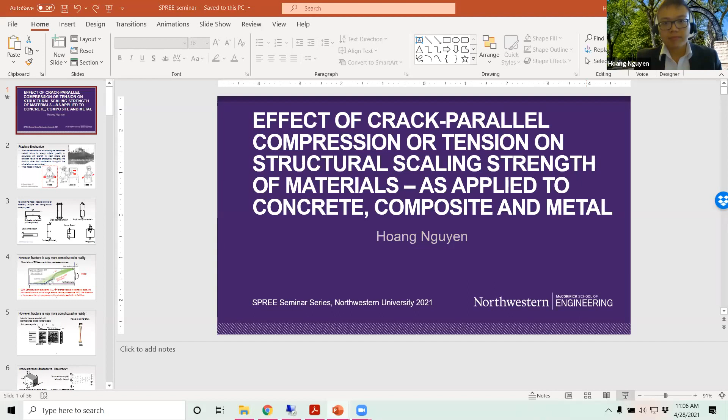As Professor Akono mentioned, I worked for a while on finding out how crack parallel compression or tension affects the structural scaling strength of materials. Today I will introduce the effect of crack parallel stress on several materials, mostly categorized as quasibrittle material and ductile material, including concrete, composite, and aluminum alloy.

Hopefully at the end of the talk, I will get you a little bit more interested in fracture mechanics and its magical world.

To start with, fracture mechanics started to grow, or originated from, some unfortunate incidents during World War II, where some ships accidentally failed. However, the design strength still satisfied the requirement, but it still failed, and the strength level they failed at was lower than expected.

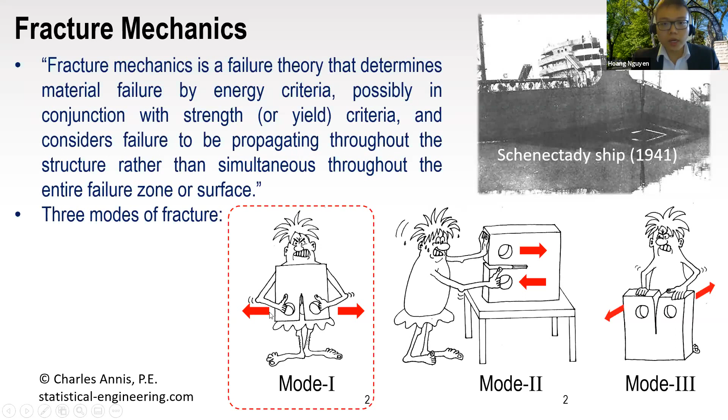For the opening mode, to extract the fracture behavior, there are multiple test configurations. You can use the single edge notch bend test, similar to a 3-point bending test, or use the same type of specimen but put it in tension. Another type is a sharply notched cylindrical tension test and the double cantilever beam.

In some extended creep experiments, people use the double edge notch, and a lot of composite testing involves the compact tension test. Tschegg, around 1985, came up with the wedge splitting test, another way to create tension ahead of the crack tip and trigger the opening mode.

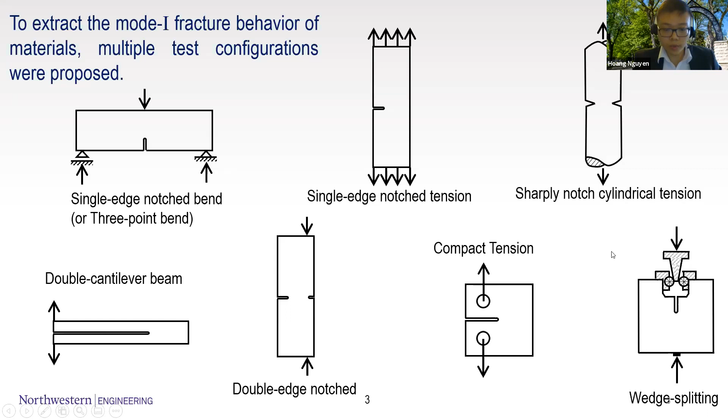However, fracture is way more complicated than that. What drew us into this direction is the shear failure of reinforced concrete beams. There were experiments done on this type of beam and loading configuration.

However, when we try to use the cohesive zone model and an LEFM-based model where the crack is aligned, we cannot capture the Vmax reflected in the measurements. When we looked into the problem more carefully, we realized that the shear fracture of beams and slabs must include a larger tensorial fracture process zone rather than a line crack.

The interactions of this zone, similar to the strut and tie model people usually use in ACI, show that when subjected to a shear crack, a compressive line forms between the support and the applied loading point. Because of that high compression, there will be interactions between the compression that's just created and the opening mode caused by the failing load.

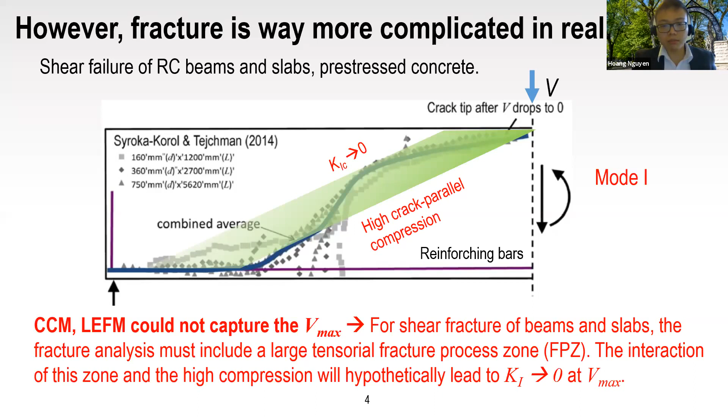From that mismatch, we think there should be some interaction there, and that explains why the LEFM and cohesive crack model could not capture the Vmax here.

Some situations are similar, for example in hydraulic fracture, especially when we couple the poromechanical stress transfer to the solid, when water comes into the crack and fractures the internal band of the crack. Under intact conditions, the rock and its surrounding environment are quite close to hydrostatic stress. However, when there's a crack, there's some release of the transversal stress, creating a deviatoric condition. Under this condition, the breakdown pressure has been observed to be either higher or lower than it should be. So that's also a scenario where crack parallel stress comes into effect.

Another scenario comes from the biomedical case, when you have the failure of a bovine femur, or the femur in general. The femur is constantly subjected to compressive load. However, when people get older, there's a change in the body condition—some osmotic effects and maybe some drying out of the bone tissue. So those gradients are changing, causing some cracks to form, and the compressive stress, which the bone is always subjected to, will cause it to fail more easily.

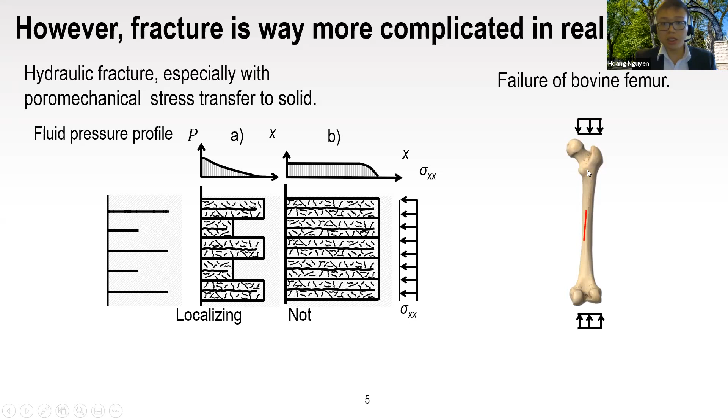So why does crack parallel stress matter? We've seen why it matters—now let's see how. Imagine a thought experiment where you have a block with a crack, subjected to several crack parallel stresses: sigma ZZ, sigma XX, and sigma XZ. In the cohesive crack model or LEFM-based model, you only have the line crack, and any existence of parallel stress will not cause any change in the stress field. This is only true when you have a very sharp cleavage that cuts through the atomic bond, and this strictly applies at the nanoscale, when two sides of the crack—or two sides of atoms—are separated.

However, in reality, damage or more mechanisms can happen. You have a damage zone, or fracture process zone—from now I'll refer to it as FPZ. Such a zone can appear at the crack, and when you have crack parallel stress, it interacts with that zone and will have a certain effect on the fracture energy. In another scenario, for example in metal, you have a polycrystal or grain boundaries forming, depending on how and at what temperature you fabricate the metal structure. This can also interact with the crack parallel stress, causing deviation from conventional theory. In this case we may see some change in GF, the fracture energy, which can cause a deviation from pure surface energy.

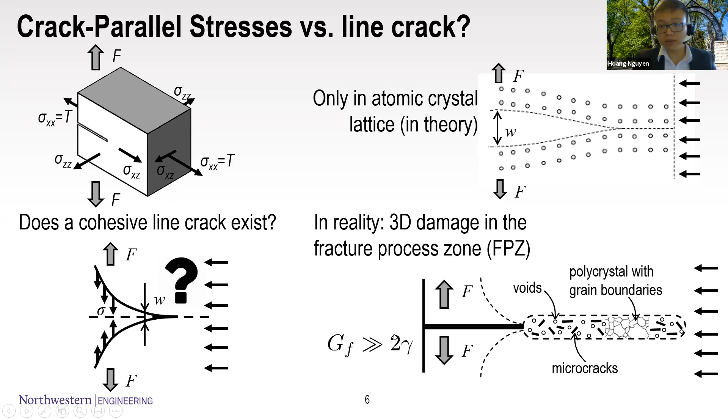However, in current experimental configurations, people don't really pay attention to crack parallel stress. That's why most proposed experimental configurations do not account for such stress. The aim of my study is to come up with a configuration where we can measure the effect of such stress, and then use a numerical model to understand what is happening within a structure that's subject to crack parallel stress.

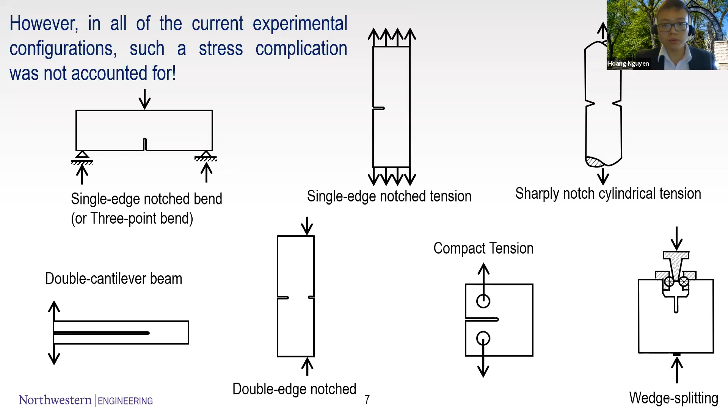Now I would mention the distinction between fracture theories. Since Griffith in 1921, fracture mechanics has evolved into several branches. The main branches can be listed as brittle, ductile or elastoplastic fracture mechanics, and quasibrittle fracture mechanics. The difference between them is that in brittle mechanics, you consider the entire domain to be linear elastic, and any nonlinearity or inelasticity is limited and can be simplified into a point.

However, in ductile material, surrounding that point and the linear elastic domain, there arises a nonlinear hardening region. This nonlinear hardening comes from the plasticity of the material, and it can also affect how it interacts with the crack parallel stress.

In quasibrittle material, that's another story. Instead of a ductile or nonlinear hardening region, you have a softening region, which is painted black here. In this case, you have a finite domain of softening, and hence it can also suggest a change in GF if you have an interaction with the crack parallel stress.

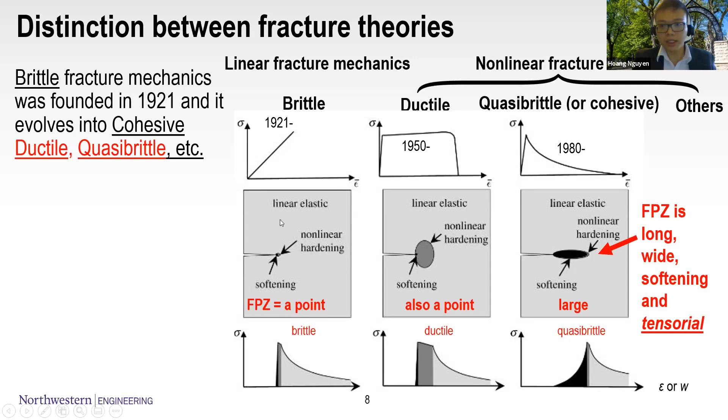So first I will talk about a quasibrittle material. What makes a material quasibrittle? It should have brittle constituents, the matrix and the inclusions, which themselves are brittle materials with no plasticity, or strictly speaking there will be some plasticity, but the effect will be negligible.

The intertwine between the materials will be created in a way that the inhomogeneity size cannot be neglected. Examples of quasi-brittle materials are concrete, tough ceramics, and some notable mentions are biological shells and gas shales, and brittle materials at the micro and nano scales, because at these scales many materials become heterogeneous.

You can see a simple illustration here showing a transition from ductile to quasi-brittle to brittle materials as the size becomes bigger.

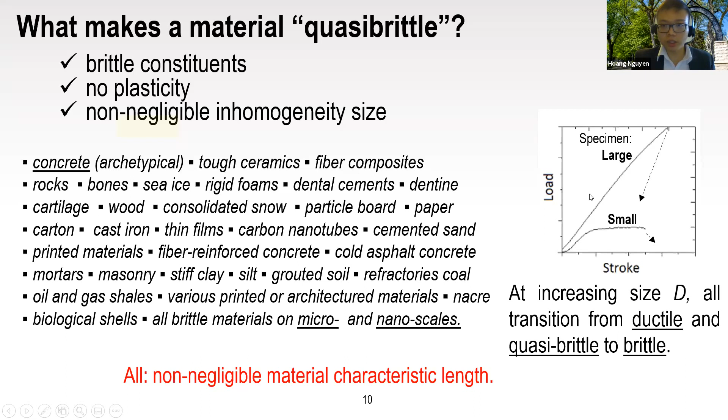For quasi-brittle materials, one notable feature is the fracture process zone. It is the area or domain where the heterogeneity takes effect. For example, for Arctic Ocean ice, it can span over 10 kilometers. For sea ice, it can be 5 meters, and for normal concrete, because of the variation in the aggregate, it can span from 5 to 50 centimeters.

For others like textile composites, the fracture process zone can be smaller and smaller when you consider materials at a smaller scale. I want to emphasize that quasi-brittleness is a relative concept, because it depends on at which scale the heterogeneity arises.

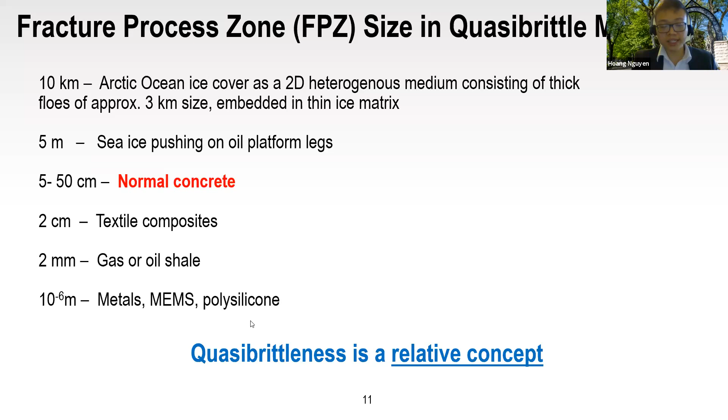So now we know something about the quasi-brittle material. How do we apply the crack-parallel stress and see its effect? We came up with a new loading configuration called the gap test. This is a simple and unambiguous way to extract the effect of the crack-parallel stress.

Several features can be listed here. You have a specimen, a single edge notch specimen, subjected to something like 4-point bending, but it's not quite right, because in a 4-point bending test you have 3 equal span lengths. In this test, the load is applied at 2 points, at a separated distance.

At the beginning, the specimen sits on a yielding pad made of a plastic material, the requirements for which I'll mention later. After the load is applied, the pad deforms elastically and then plastically at the end, but it will not be subjected to any bending moment, because there was a gap here.

However, after a while, the gap will close while the crack-parallel stress from the pad is still applied, and the bending moment that can trigger the crack starts to apply here at the support. Later, the crack tip will be subjected to both tension from the crack and compression from the crack-parallel stress.

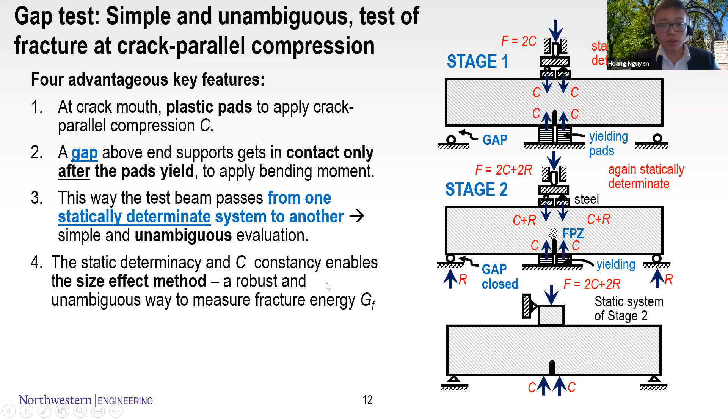A more detailed schematic setup is shown here with some steel pads, and there are technical requirements where you don't allow rotation and slip in the experimental configuration. Also for the plastic pad, because there's no rotation here, we can conserve symmetry, meaning equal deformation on the plastic pads.

As I mentioned previously, there's one requirement for the plastic pad: it is supposed to give constant pressure, or constant crack-parallel stress. So it should be made from a material that can produce such behavior.

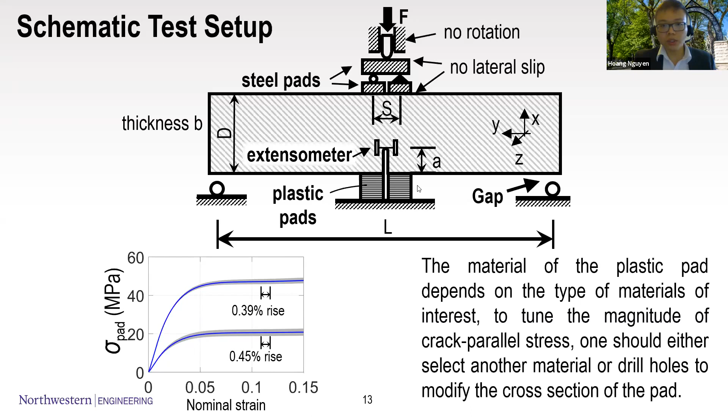For concrete, I found a material called polypropylene that has a very clean and good yield plateau, where the rise of the plateau is around 0.39% when the moment starts to apply. You can change the crack-parallel stress level by changing the material to others with similar behavior, or you can design the cross section of this material to modify the crack-parallel stress that you want.

This is a realistic test setup, and here you can see it reflects exactly what I just showed in the schematic. One loading process starts with the increase of load, from the elastic and then plastic deformation of the plastic pad.

After a while, it touched the side support, and the moment triggered the opening mode of fracture, causing another rise.

So the requirement here is that you have to leave the gap so that the fully plastic strand is developed within the pad. You can confirm that after the specimen breaks, you see the drop back to the plateau.

When I did the experiment, I put an extensometer, because this is the most exact way to measure the deformation in the experiment, rather than the machine displacement, which can cause a mismatch because the machine has some stiffness.

Extracting that information from the specimen, you can read the load and crack tip opening displacement, and gain some understanding about how the fracture developed and the fracture energy within this material.

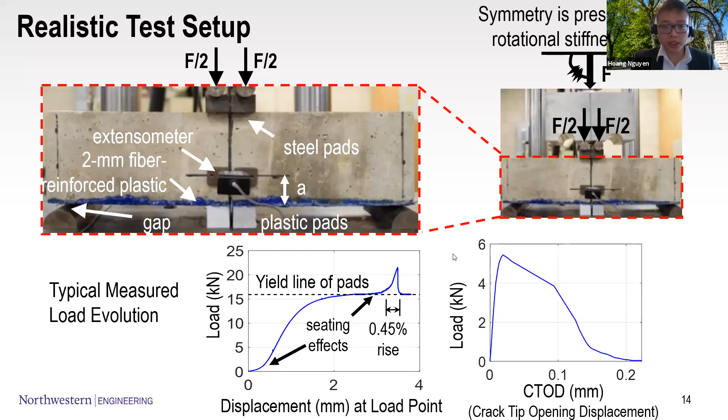So I used a numerical code to confirm the uniformity of the stress field when subjected to the crack-parallel stress here. You can see that the stress field is quite uniform, especially near the crack tip, even when you reach the maximum moment when the crack starts to grow.

This is very important, because if you use too narrow a pad, the stress field cannot be as uniform. You can see at the edge there's some bulging area of the stress, and then the stress measured at the tip will not be exactly reflected by the stress at the plastic pad.

There's also some caveat here, because you can see there's a crack, so the stress measured from the pad, which is also measured from the machine, is not exactly the stress here at the tip.

So to visualize the real sigma x at the tip, we use a numerical model. We found that the elastic model can give a quite accurate approximation of the real model with damage, so the elastic solution can also suffice.

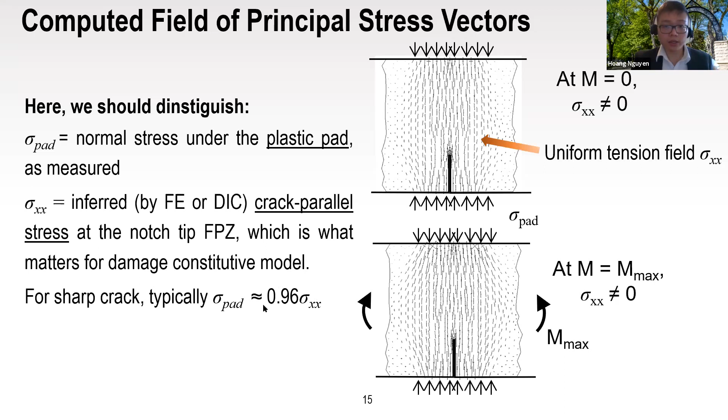It's worth mentioning there were some attempts at similar ideas. However, for Tschegg in 1995, he...

developed some of the early idea of the test in 1990, and then finalized and perfected the design using wedge splitting along with a second fixture to apply the crack-parallel stress on the wedge splitting specimen.

I will mention size effect later and how it matters. However, one big caveat of this test is that you have a non-uniform crack-parallel stress field, because when you apply the opening mode, a certain part of the applied load goes into the vertical component, which transfers into the specimen, causing non-uniformity in the stress field.

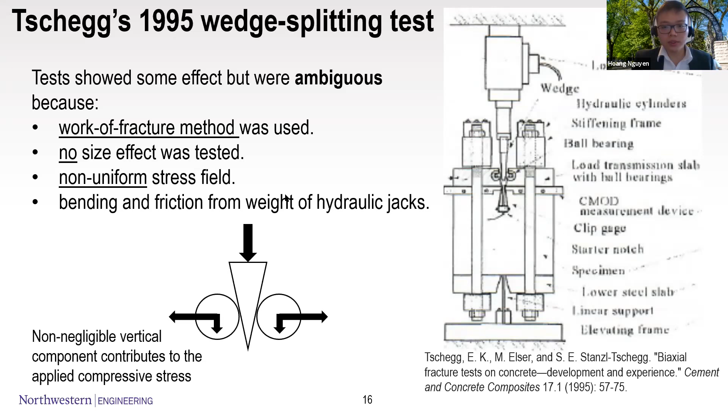So one key point of the gap test is the design and how to apply the crack parallel stress onto the specimen. Another is the size effect method.

The size effect method is a way to measure the fracture energy of the material, and this fracture energy corresponds to the initial part of the cohesive law for one material point.

For example, if you use a cohesive model and implement a bilinear curve for the cohesive law, the size effect will give you the energy of the initial part only. This is the most important part, because the later part happens only under very large separation, requiring a very big opening of the material.

At that stage, the load measured is far in the tail already.

That kind of information is important only when you consider ballistic resistance or impact resistance of the material. But in most cases of quasi-static structures, the small GF is what matters.

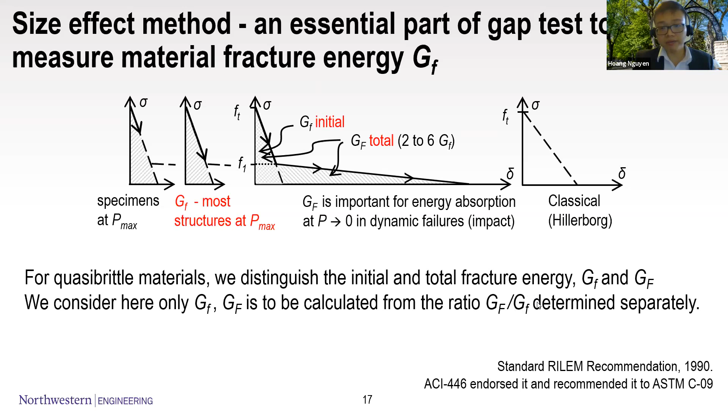However, the capital GF can be calculated from a certain ratio of capital GF over small GF, once you know the small GF.

Another caveat of the capital GF is whether or not the tail of the curve is unique. For example, in the case of a three-point bending specimen, when the FPZ starts to grow and propagate through the specimen...

at the end you have the boundary effect. So the entire FPZ changes at the end, and what you measure may not exactly be what the material properties should be.

That leads to change or variation in the J-integral with crack length, and as a result, an ambiguous reading of the fracture energy.

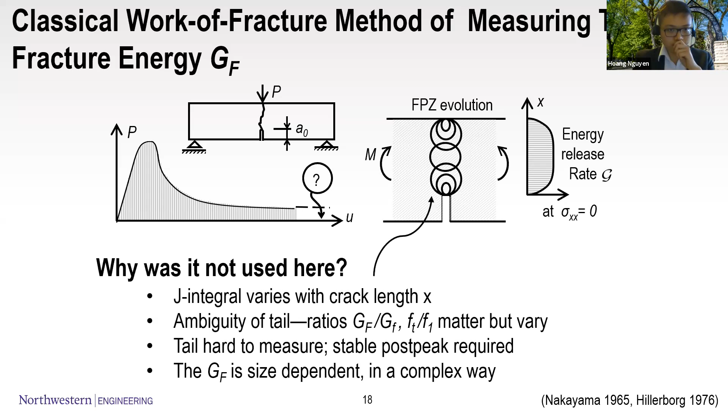So how to do the size effect method? The size effect method is based on the basic assumption that the FPZ of the material is a constant, has a constant area or constant volume. When you scale the specimen to a bigger size, that domain, that area or volume, does not change.

So you can break the energy of the materials into the part that will be released, which changes with the size—the elastic part—and then the energy dissipated within this zone, which you can see does not depend on D.

After manipulating this to get sigma n, the nominal strength—in most cases defined by the maximum load you can measure over the thickness and the characteristic length—you can obtain the relation between the nominal strength and the size of the structure you measure.

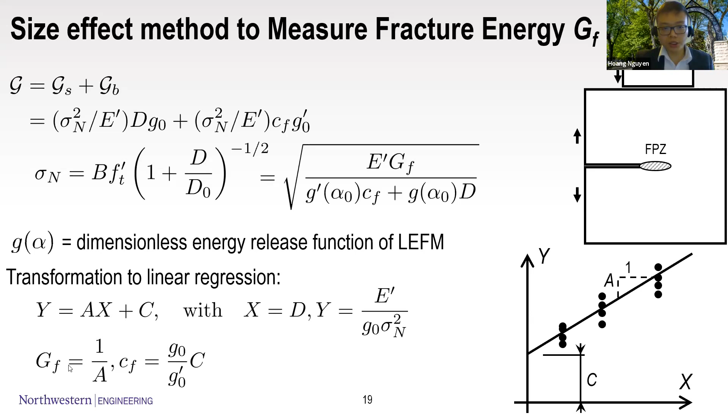This can be turned into a linear regression curve, and by fitting this, we can extract GF and CF, which is the characteristic length of the materials.

So for the size effect, if we expand the size effect curve in the regime near zero dimensions, we have some asymptotes when you have 0D. And if we expand with a big D, we have another asymptote with infinitely large specimens. This is the asymptotic matching size effect law, and it can be seen here.

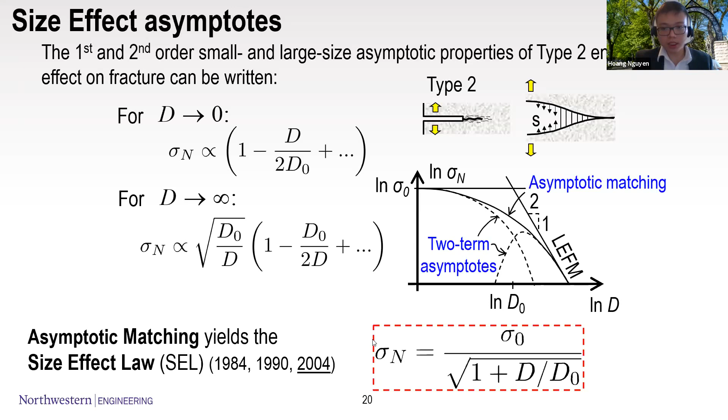I'm sorry, do you see my panel? Because I keep moving them around. I'm not sure if the audience sees the same thing as I am. You can see it, Zdeněk. Oh, okay. Let me share this slide only. Yeah, I think this one will be less disturbing.

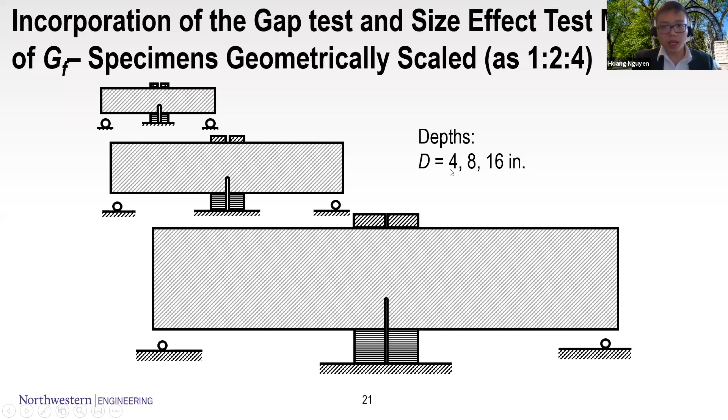All right, so now we incorporate the gap test and the size effect test method to get the fracture energy and to see how the crack parallel stress affects the fracture energy. You can see that we scale the entire setup, keeping the aspect ratio the same, and also the out-of-plane thickness the same.

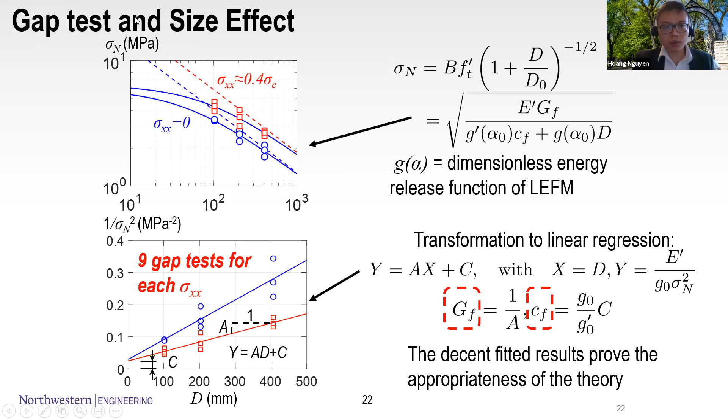The result from the gap test can be shown here, and it follows quite reasonably with the size effect method. From these, we can extract the GF and the CF, as I mentioned before.

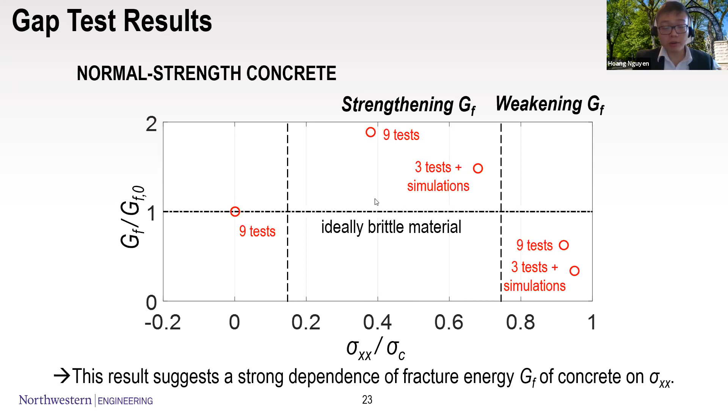So how to explain these mechanisms and the relevant behaviors? We used a model called the microplane constitutive law model, trained within our group. The model is based on breaking the stress-strain tensor into stress-strain vectors on many, or multiple, microplanes.

This reflects the fact that in quasi-brittle material, heterogeneity will also appear—the stress and strain vectors appear on the surface of the heterogeneity.

This model can capture several behaviors, especially in the triaxial stress state that appears at the crack tip: tensile cracking, splitting or spreading of microcracks, and also frictional dilatancy.

This constitutive law uses the relation between stress and strain vectors to model the behaviors, and then turns the stress vectors into the stress tensor via the variational principle.

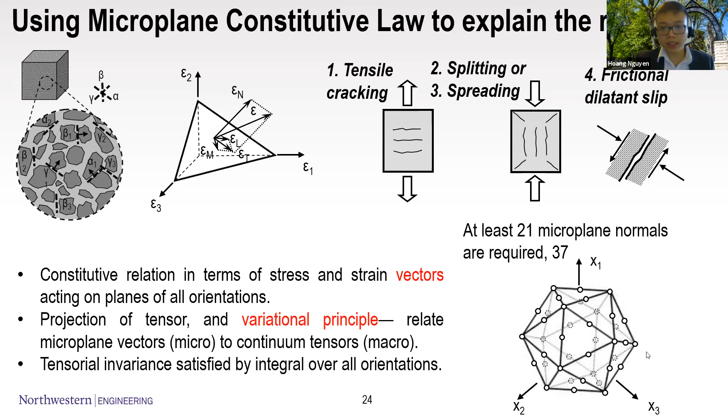Within this framework, at least 21 microplane normals are required to get a certain level of accuracy. However, in this study, we used 37.

The microplane constitutive law gives you the relation of those strains to the corresponding micro stresses. Then the principle of virtual work helps turn the micro stress vector into the macro stress tensor.

An important case that the microplane model can simulate is the vertex effect. This is a path-dependent material loading path, where you first compress the cylinder and then apply torsion to it. The plasticity-based model will predict constant stiffness for this loading scenario. However, in reality, experiments show a decrease.

Sorry, Hoang, can I interrupt you? There's some strange behavior in the chat we need to deal with. Should we just remove this person, Angie? I don't know who this is. I saw some pop-ups, I think we should remove them. I don't know who this is, but I have the ability to do it. Sorry for the distraction there, keep going. Angie, let's keep an eye on whoever that is and kick them out again. Okay, go ahead Hoang, sorry. Sorry to everybody for that very distracting series of bizarre chats appearing there. This is my first experience with what I think is Zoom bombing. Yeah, I don't know how we got Zoom bombed, it's supposed to be restricted. Okay sorry Hoang, we'll keep an eye on it. It's not a national secret so hopefully it's not leaked anywhere. They're not chatting anything too offensive, just bizarre and distracting. I think they've left, I removed them, hopefully they don't come back.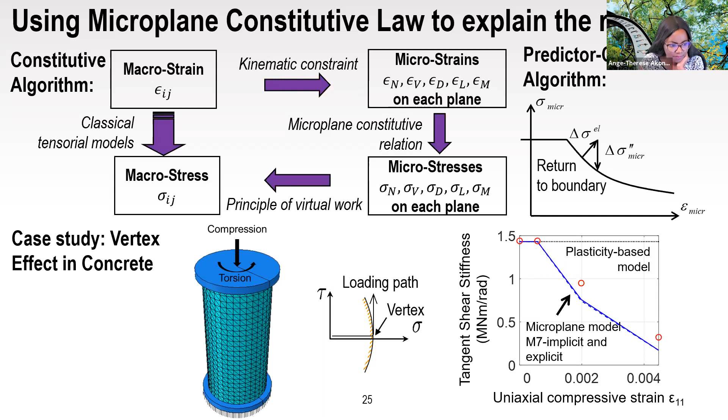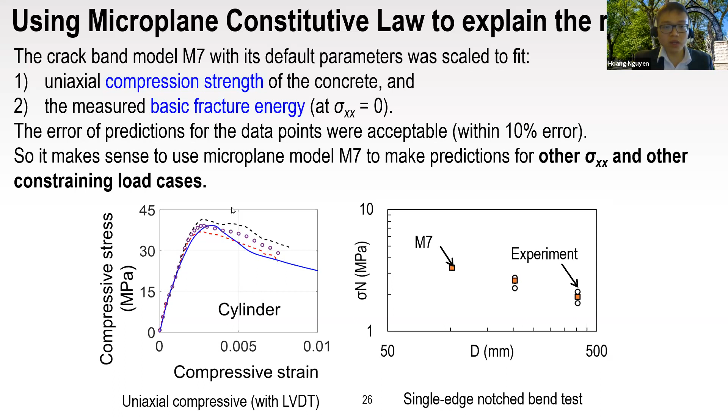So continuing, the microplane model is basically tuned or parameterized to fit several phenomena in concrete, covering a wide range of behaviors. Here we inherited some of those parameters and changed only the ones needed to fit our demand. We tuned the free parameters to fit the uniaxial compressive strength of the concrete, since it directly relates to the compressive stress applied to the specimens. Another parameter is the basic fracture energy, from the same test but without applying any pad, so sigma xx equals 0, giving a baseline fracture energy GF0. From the fitting results, we get a decent fit, and we can use sigma xx to predict material behavior when sigma xx is non-zero.

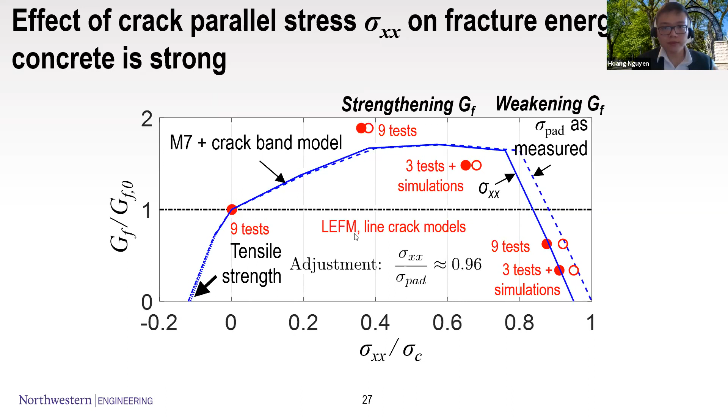One note to pay attention to is the two different curves, because as I mentioned earlier, the applied stress sigma is not exactly the stress level at the crack tip, so we have to extract the information from the microplane model at the elements at the tip to get sigma xx at that level. The same trend shows when comparing the characteristic length of materials at different sigma xx. If we assume the characteristic length CF is 40% of the Irwin length, we can calculate the Irwin length and apply it to a cohesive simulation.

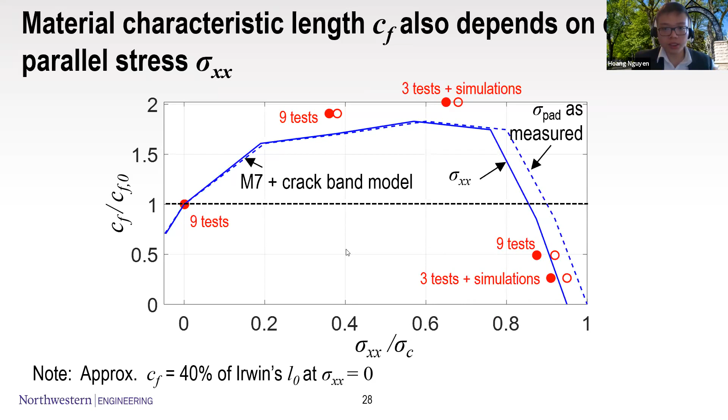So what were the mechanisms leading to that non-monotonic trend? We hypothesized that at the intermediate stress level, there's a strengthening behavior. This strengthening comes from the high compressive normal stress level that increases friction and interlock between the small and large aggregates within the concrete. When the materials separate due to the bending moment, this interlock and friction increase the strength and resistance against opening mode.

However, when the stress increases closer to the compressive strength of concrete, slip and splitting bands form at the crack tip. Because of this slip and splitting band, it expands the volume of the material at the crack tip, causing a drop in fracture energy. However, the width of the fracture process zone will be widened. This is just an eyeballed picture, and we're now inviting collaboration with a group that has advanced imaging techniques to prove the hypothesis proposed here.

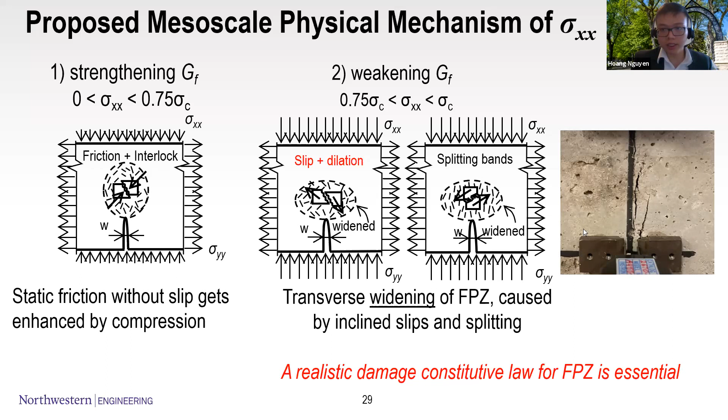So we see the effect of sigma xx, which is pronounced in the fracture energy of the material.

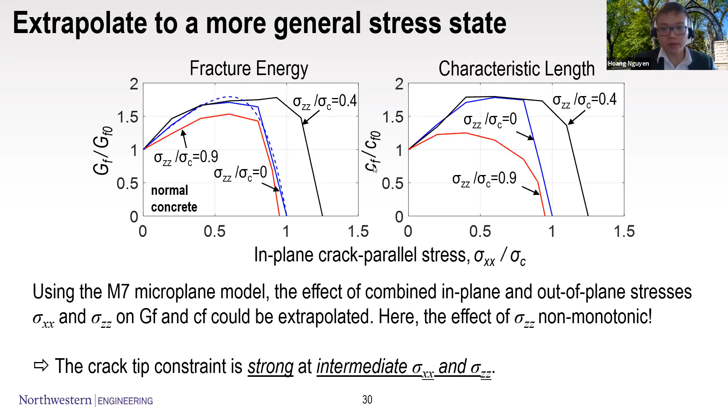So, okay, now we see that the GF depends on sigma xx, and with any cohesive law and crack model and LEFM based model, it cannot be used if such a phenomenon is simulated, right?

So then, we can still use a cohesive zone model or a line crack model when GF is modified as a function of sigma xx, and then from the shape of the curve, we propose a form of the function of such a dependence here.

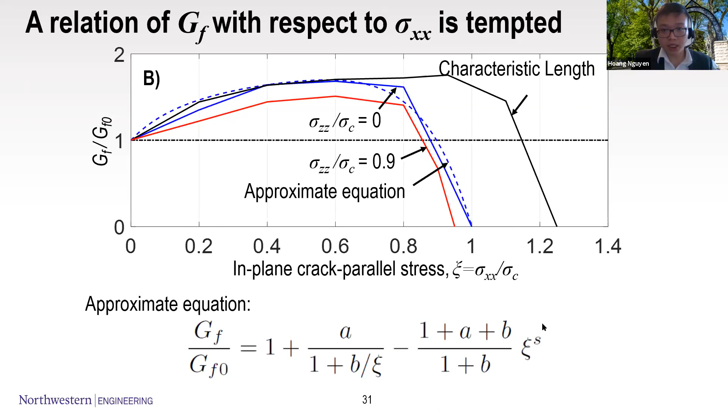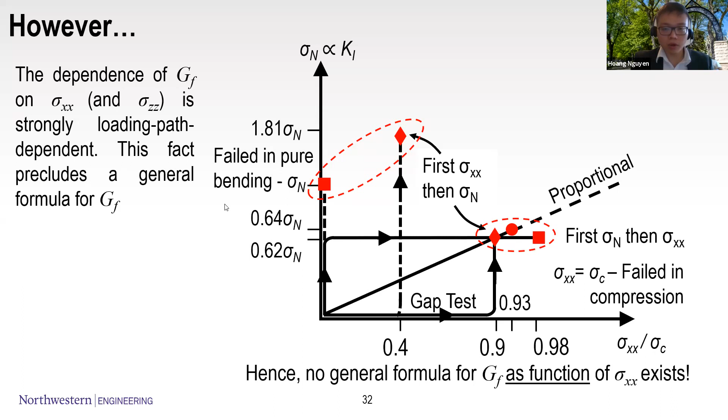So it's good, right? Not quite, because the relation I mentioned is loading path dependent. It is path dependent in a way that when you apply the crack parallel stress field in the gap, as in the case of the gap test, and then you apply the fracture or bending moment to create fracture, it will result in a different GF from the case when you apply the moment first and then apply the compressive crack parallel stress. So this negates the purpose of GF as a function of sigma xx, and it calls for using the correct model whenever you have to deal with similar scenarios.

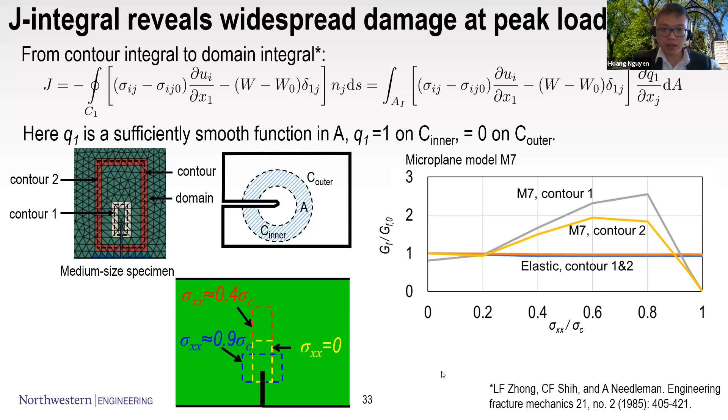So I can see some change, in a relative way, about when you have an intermediate stress level of sigma xx, there's an increase in the FPZ here, but not an increase in the lateral side. But when you have a higher stress sigma xx, you have an expanding but shorter FPZ, which somehow reflects our hypothesis. But again, it is just a very rough estimation, and it calls for more advanced imaging techniques.

So another point we should note is if you use the Mohr circle to plot the stress trend, the stress state at the crack tip, and if we denote tau as the difference between sigma 1 and sigma 3, which is the stress causing the fracture to occur, and sigma as the crack parallel stress, you can see that no envelope exists here when we zoom in on the image.

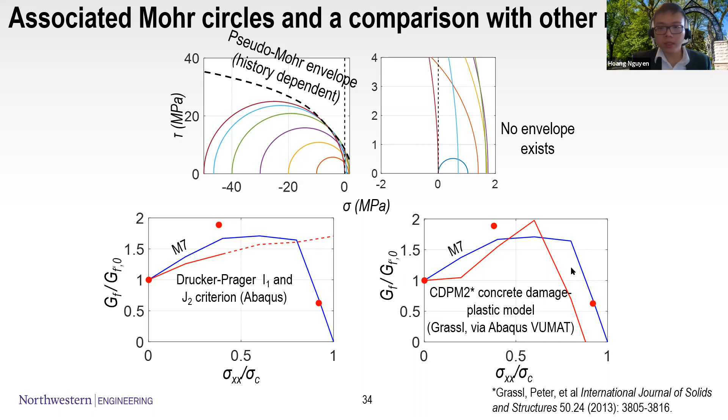Another note on the type of model that can simulate this phenomenon: Drucker-Prager is one case that failed to produce such a result, and you can see it produced a wrong trend here. We also examined CDPM2, which is a tensorial model of concrete, and you can see that because it captures some triaxial stress state behaviors, it can follow the trend of the data points, but not the value.

Knowing the result for concrete, we attempted to do some prediction for fiber reinforced concrete. As we know, it has a higher baseline fracture energy because when the concrete has fiber, it has a bridging effect that resists the crack opening, leading to higher fracture energy. However, the trend is kind of similar. Another note is that it has a more gradual drop when sigma xx comes close to sigma c.

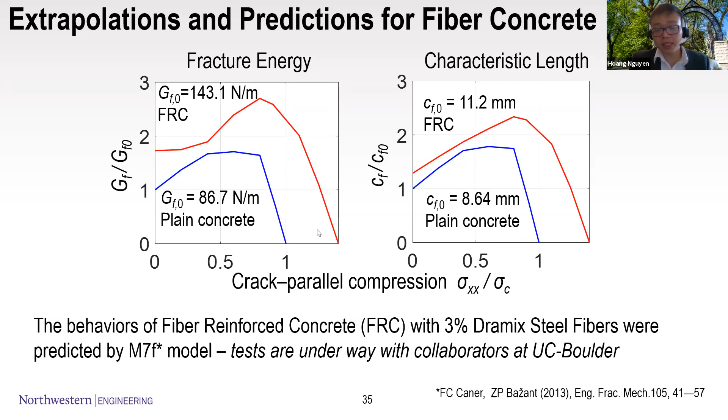Another extrapolation we've done is for shale. The fracture energy for shale, in the case where the bedding plane is perpendicular to the crack, follows strictly the trend in concrete. However, when the bedding plane is parallel to the crack, because it's very sensitive to splitting, since you have the weaker plane already aligned with the crack, the strengthening regime is very limited, and it's more sensitive to sigma xx. However, this is not usually the case in fracking, because there the crack expands perpendicular to whatever the bedding plane is, based on the natural stress state of the rock.

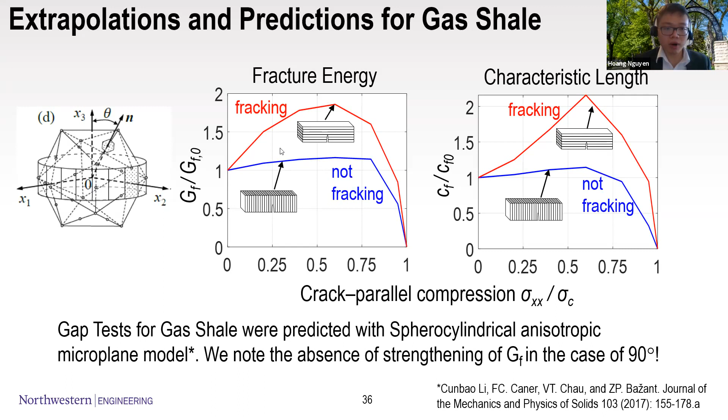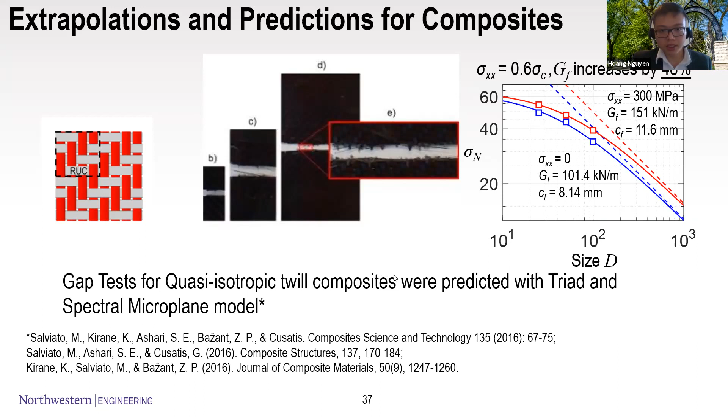The final prediction for quasibrittle material is for composite. We applied the same testing configuration to composite, at 60% of the compressive strength of the composite, and we see an increase of 48%. This composite is a quasi-isotropic type, meaning the fibers run in all directions: 0, 90, 45 and minus 45 degrees. So that is the fracture of the quasibrittle material, and we see a very strong effect of sigma xx on GF.

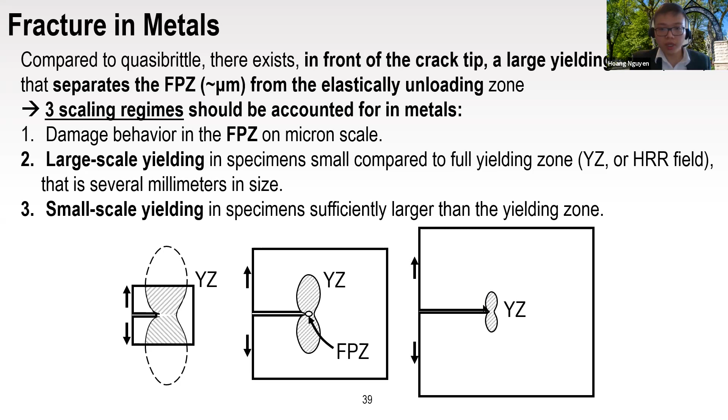So how about more ductile materials like metal? In this case, the story is a bit different. In metal, instead of a very large fracture zone, we have instead the yielding zone, which is the volume where the material becomes hardening. In large scale yielding, this zone can cover a very large part of the specimen or structure. However, as the structure becomes bigger and bigger, that ratio becomes smaller, and the yielding zone becomes completely contained within the specimen.

This difference accounts for another theory to scale the structural strength to extract GF. We hypothesized three types of asymptotic domains. The first would be the FPZ scale, which is the micron scale. The heterogeneity size of metal is quite different from concrete or other quasibrittle materials, depending on the grain scale or grain boundary, where grains with different crystalline orientations are arranged differently and separated by boundaries.

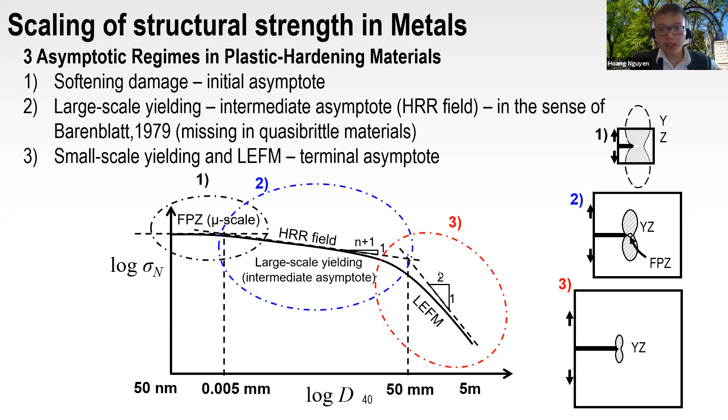Also, you have the rise of the intermediate regime when you have large scale yielding. As the specimen becomes bigger and bigger, this yielding zone becomes very small compared with the entire structural size, and then it converges to the LEFM theory.

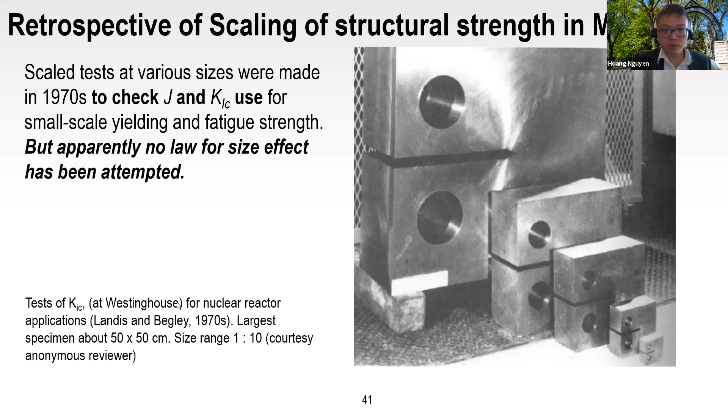It's worth noting that there were some pictures about the scaling of specimens at different scales using metal. However, such a size effect has not been attempted or measured, and these only served to investigate fatigue strength. Those were tested at Westinghouse, and we received them from one of the reviewers of our papers.

So how do we come up with the correct theory for scaling ductile materials? First, we took advantage of the HRR theory, an abbreviation of the names of its founders, Hutchinson, Rice, and Rosengren. This is based on using the deformation theory of plasticity, meaning they use the total strain as the plastic strain theory.

This strain presumably follows the nonlinear elastic regime, in which case you don't have any unloading happening at the yielding zone or the HRR field. The Ramberg-Osgood law assumes that the strain is a power law of the stress, and hence it results in the corresponding power relation of the strain and the stress.

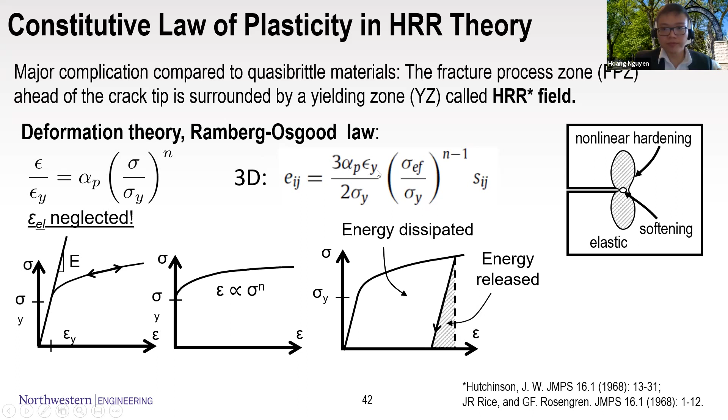Using large scale yielding, where the specimen size is comparable to the yielding zone, you can derive the power law of the strain field and displacement field. The stress field should follow the power of -1 over n+1. Because of the relation from the Ramberg-Osgood law, the strain follows the power of -n divided by n+1. The displacement field is the integral of the strain field, so it follows the 1 over n+1 field.

To scale it correctly, instead of using a very complicated shape for the yielding zone, we condense it into a single characteristic size that can represent the yielding zone. We hypothetically assume it is a circle, and then the radius of that circle can represent the entire yielding zone.

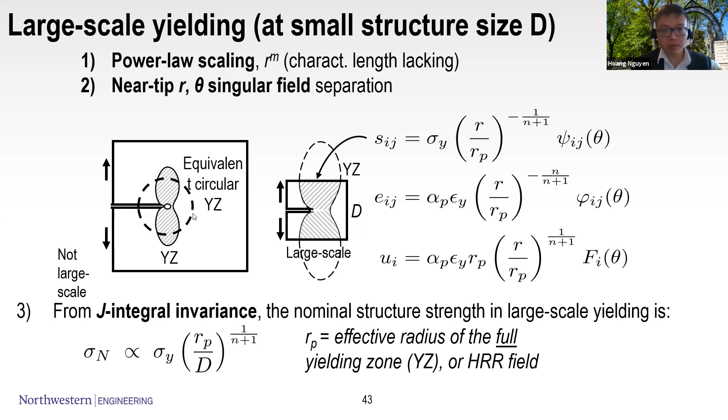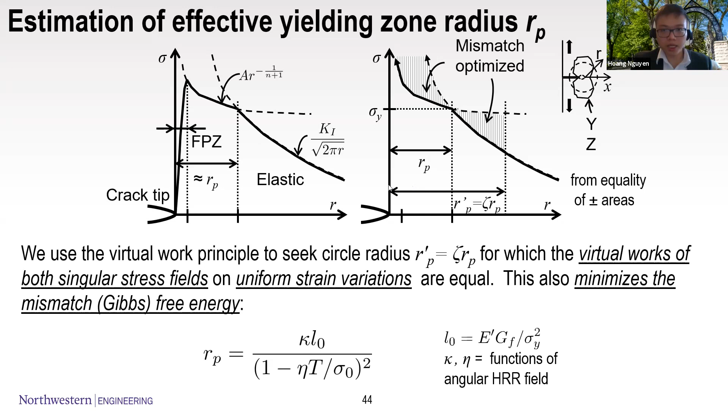We can use the virtual work of the singular stress field and uniform strain variation to calculate such an RP, then use the same strategy of breaking the energy into a term that depends on size and a term that doesn't, to scale the materials. However, the caveat is that we should always use the scaling of structures that completely contain the yielding zone.

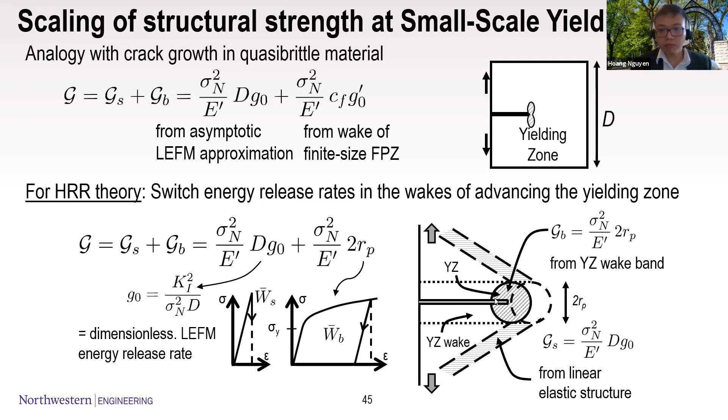The energy comes from the release of the elastic band of the material and the release from moving up the wake of the plastic zone. From the material point of view, the energy breaks into two parts: the plastic part and the part that comes from the fracture process zone, which is micron scale.

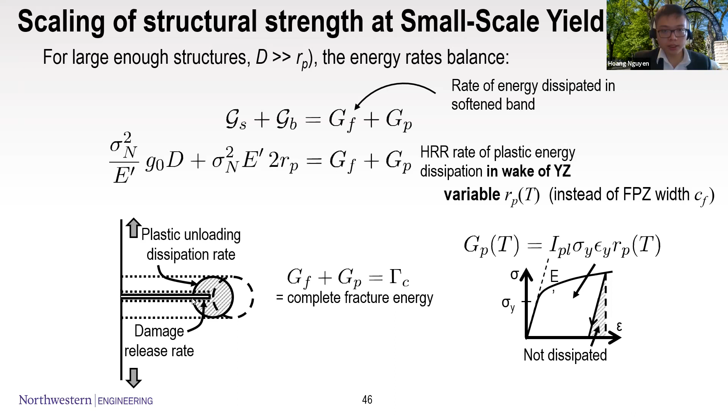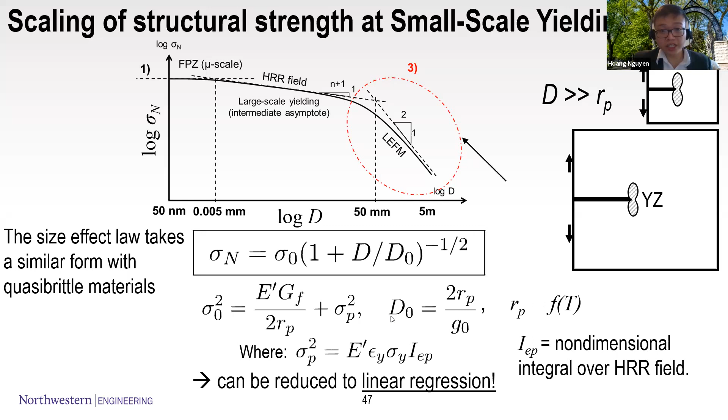The assumption I mentioned applies for small scale yielding, when the structure has a size bigger than the yielding zone size. That ends up with a similar formulation for the size effect, but the relevant terms differ from quasi-brittle materials, and some details should be read using the non-dimensional integral over the HRR field, which accounts for the shape of the field.

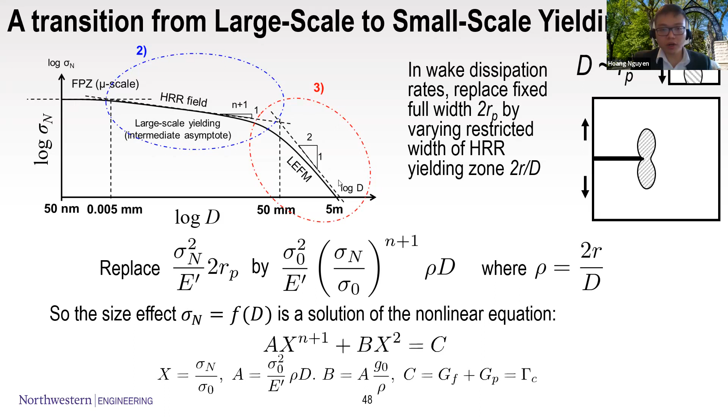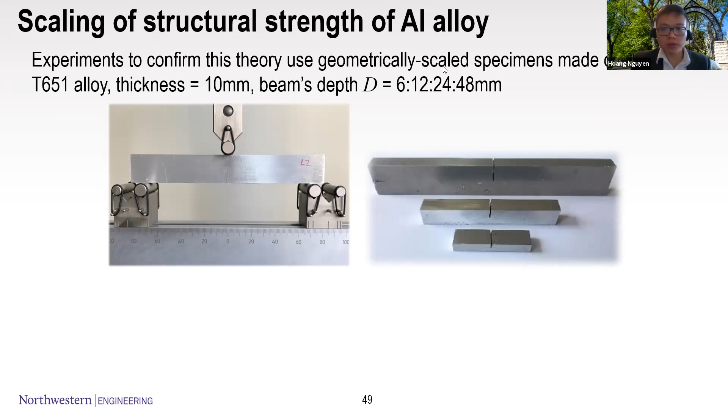Dr. Abdullah Donmez, who is in Turkey now, helped us run tests on aluminum for the size effect, specifically aluminum alloy 6061 T651. The results show that such a law can be applied.

So either you assume small scale yielding and fit the large size structure, or you have large scale yielding and transitional yielding, and use the transitional formula to fit the GF. Such GF converges quite reasonably to the J integral, with the difference within 10%.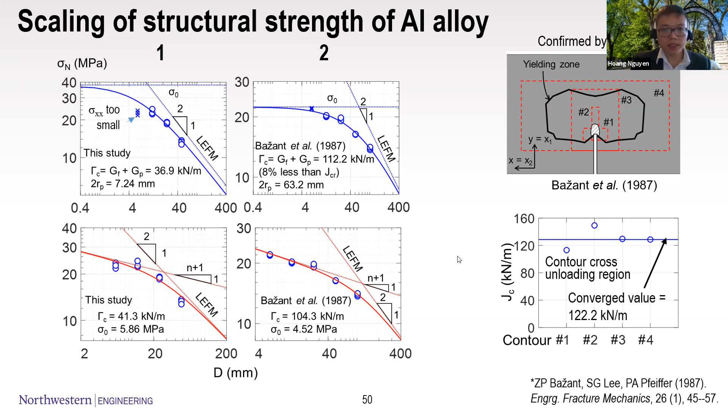Now it's time to see the effect of crack parallel stress. As I mentioned, it's different from quasi-brittle materials: here the crack parallel stress interacts with the yielding zone rather than the fracture process zone.

Some previous studies have been done. For example, Cotterell and Rice observed the crack path deflection due to the presence of T-stress, but not a change in GF.

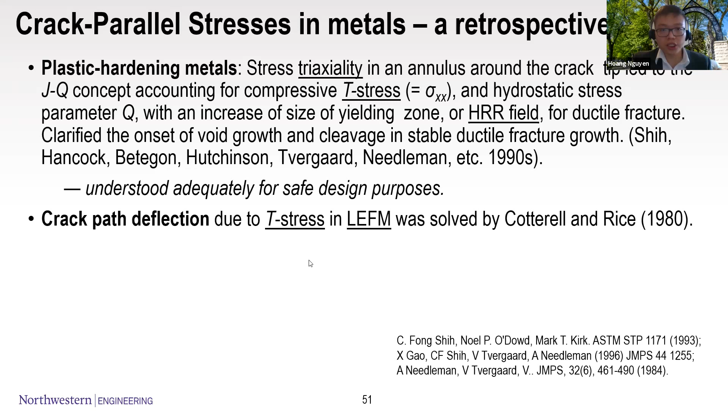So here we apply the gap test protocol to the aluminum specimen. As I mentioned, the plastic pad needs to be changed to match the maximum yield strength of the aluminum. We use copper, and for lower stress, we use the PVA pad, which can reach around 100 MPa.

We can see an increase in the fracture energy when we have a 15% increase in sigma XX.

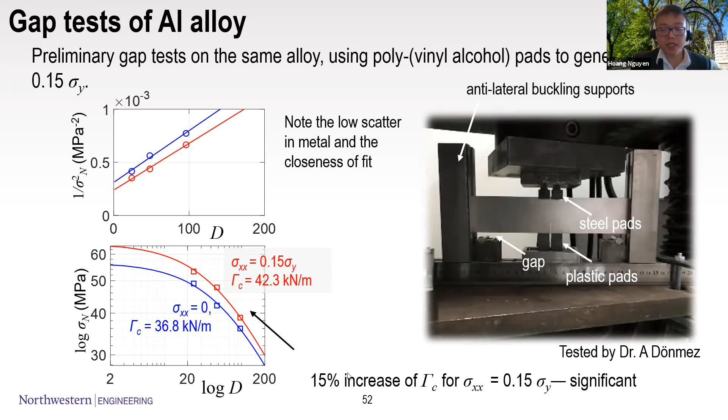And this change is tied to the increase of the yielding zone when you have a larger sigma XX here. And from using...

Using a plastic damage model by Professor Dr. Bai and Professor Wierzbicki at MIT, we see some qualitative increase in the yielding zone size here, which reflects the fact that GF increases with the sigma XX. However, right now the quantitative result is not as promising, so we are doing some training of the microplane model for such a behavior.

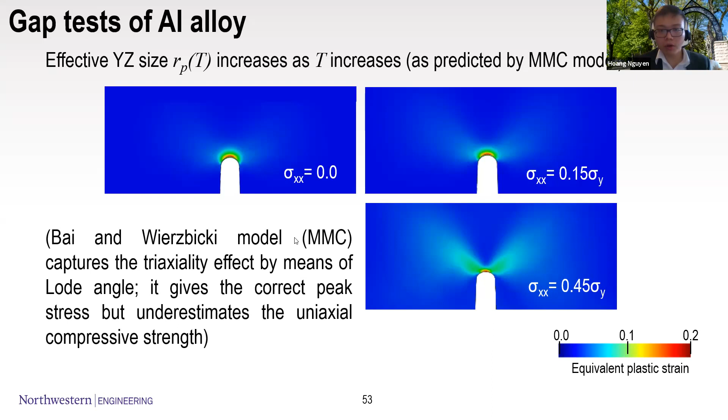In conclusion, the crack parallel stress should be considered when you have the fracture energy of inelastic materials, and the same conclusions can be drawn if the materials have any characteristic length that can interact with the triaxiality of the stress state at the tip.

The scaling of the structural strength is an effective way to obtain the fracture characteristic or fracture behavior of the materials. And the computational model, in order to be effective, should adequately describe the microscale mechanism.

Some examples can be listed as LDPM by Professor Cusatis and the microplane model by Professor Bazant here. For quasibrittle material, the FPZ is the one that mainly interacts with the sigma XX, and in ductile material, the yielding zone is the one that plays an important role. At lower scale, the FPZ will start to manifest itself.

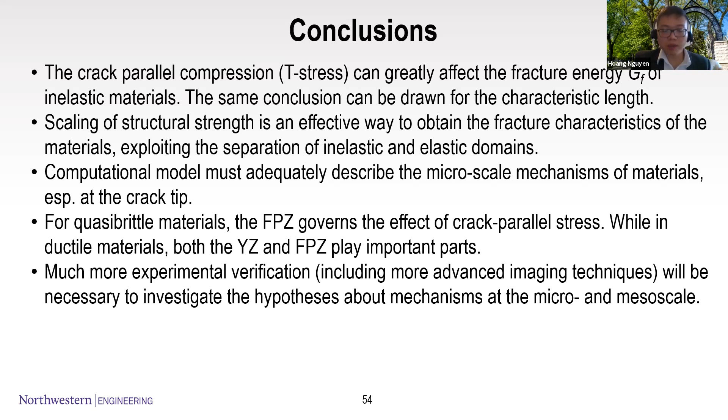As I mentioned during the talk, much more experimental verification is necessary, not only for other materials but also to image what we have hypothesized as the mechanism within the micro and meso scale happening at the crack tip. I want to acknowledge my collaborators, the professor at Northwestern, and also Professor Issa at UIC that helped me during the research.

And with that, I want to thank you for all of your attention, and I will take questions from here. Sorry, I'm a bit over time.